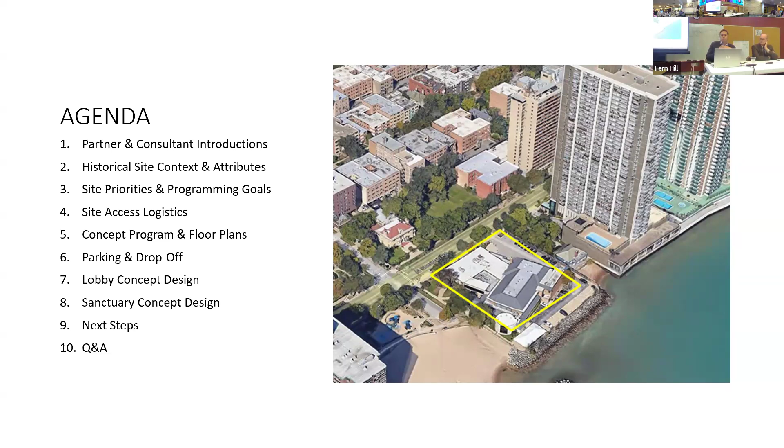We already went through partner introductions, so just in terms of our roles: Eckenhoff Saunders is an architecture firm, Fern Hill is a development company, and together we're advising the synagogue on its future plans.

Again, a brief history—many of the members here know this, but for those online who may be just finding Emanuel congregation for the first time, I wanted to put this in context of how we ended up here today. The synagogue was founded a very long time ago, in 1880. A group of members purchased the land site we're on today in 1944, and at the time there were roughly 1,000-plus member households.

The existing synagogue was constructed in 1955, so a very long time ago. It was, or is, 34,000 square feet.

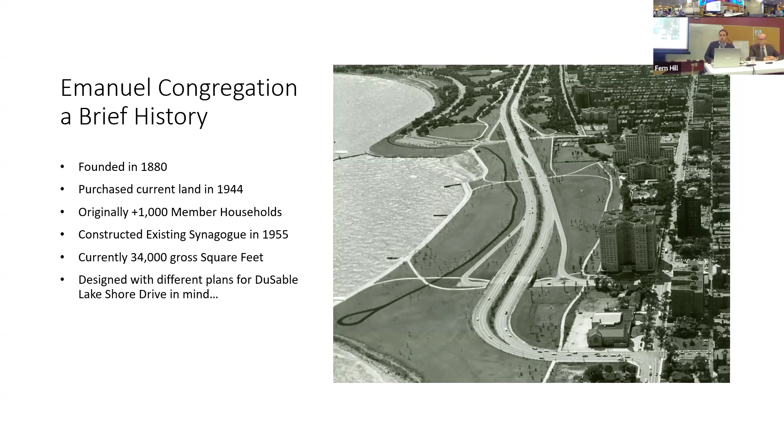The reason there's a picture of Lake Shore Drive is that it was a seminal fact at the time—the synagogue planned for Lake Shore Drive in the late 40s and early 50s to actually run past the synagogue property on the east side, which is now lakefront. Then, a little after 1955, it was announced that Lake Shore Drive would stop at Hollywood. So here we are today, 80 years later.

So even though it was 80 years ago, that's still something that affects the synagogue today, and how the building is positioned on the site, and really the broader Edgewater neighborhood as a whole. Because a lot of the issues that both the synagogue deals with, and the broader community with traffic and congestion, really stem from 80 years ago, when Lake Shore Drive ended at Hollywood instead of continuing past this neighborhood to Rogers Park or all the way to Evanston.

It's interesting that something so long ago is still so relevant today, and really changes how we look at the site. We couldn't help but think about the future, but I wanted to show a graphic of how different things would be today if Lake Shore Drive did extend.

A lot of how the site is set up today makes a lot more sense when you see a highway on the backside, because the building really does turn itself away from the lake. Which today we think of as so counterintuitive, but 80 years ago the members were planning for a totally different future and circumstances that they thought were coming.

So there was a single access point to the northwest corner, which is how you come into the front of the building and parking today. Just looking back for a moment before we talk about where we've been, before we talk about where we're going.

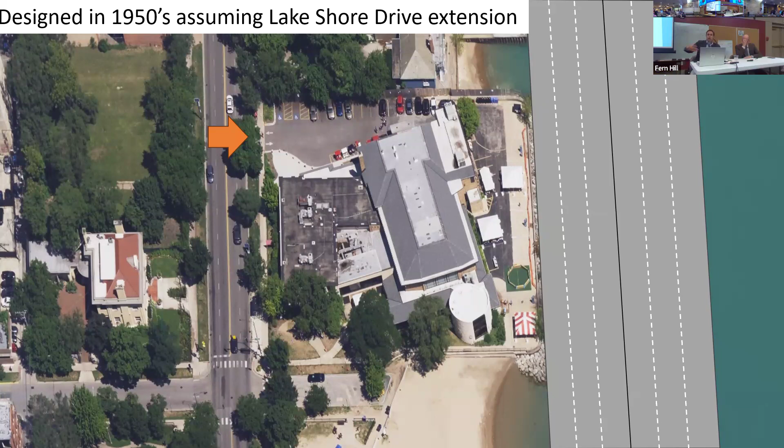To the north of the property it's a pretty hard line, with a very small site with a single family home, and then a very large condo building to our north. On the south and east side of the property, it's a little softer.

You can see there's more green, the lake to the east, the beaches to the south. So there's a dichotomy of harsh Sheridan Road and urban landscapes to the west and north, and then that quickly transitions into much more serene and natural areas.

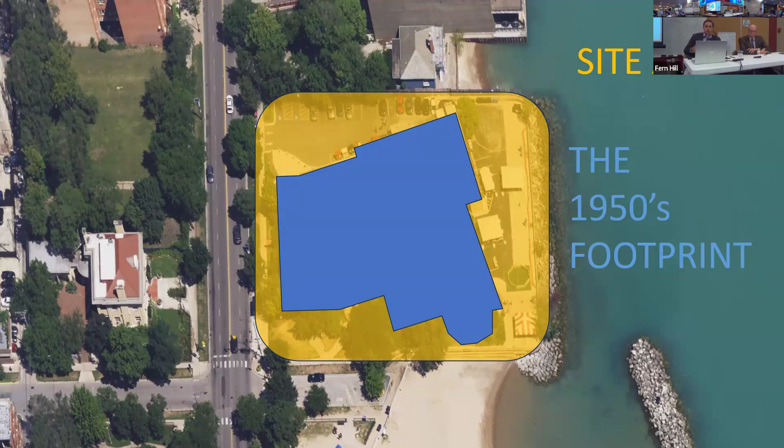Very high level, this is looking at the piece of land, which is roughly 64,000 square feet, and the shaping of the building that's on here today. It's a relatively large footprint building covering the whole site, but not particularly efficient.

So what this represents for you all and for us is the ability to completely reimagine your future. So as opposed to looking at what is, it's really looking at what could be.

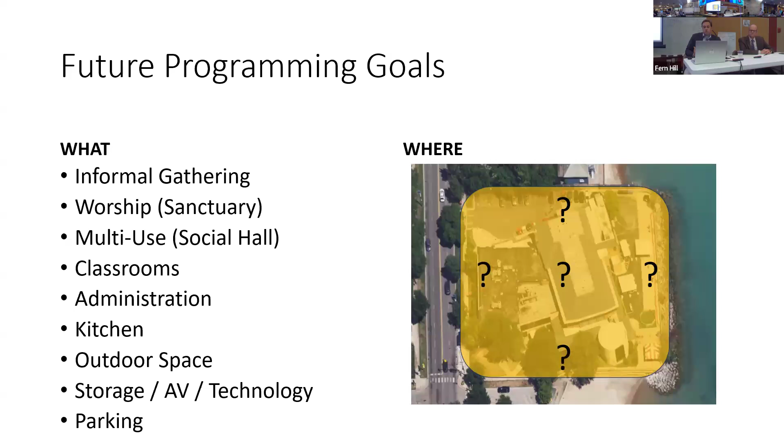The programming goals that you all have been thinking about include informal gathering space, worship and multi-use spaces, classrooms and administration, and back of house things like kitchen, storage and technology, and of course parking. So it's for us, it's finding not only what needs to be programmed into your site, but also where it needs to be. And not to bury the lead, but this is what's most important.

The main objective is really undoing the 1950 decision to turn the synagogue away from the lake, and instead re-engage with Lake Michigan and embrace the lakefront.

It's also an opportunity to right-size for today's members, the size of the synagogue, and the types of programming. The simple move, which you'll see when I pass it off to Matt, is shrinking the footprint and moving it all the way east to be on the southeast corner, predominantly of the site, the best corner, engaging the lake, overlooking the beach with the skyline in the background.

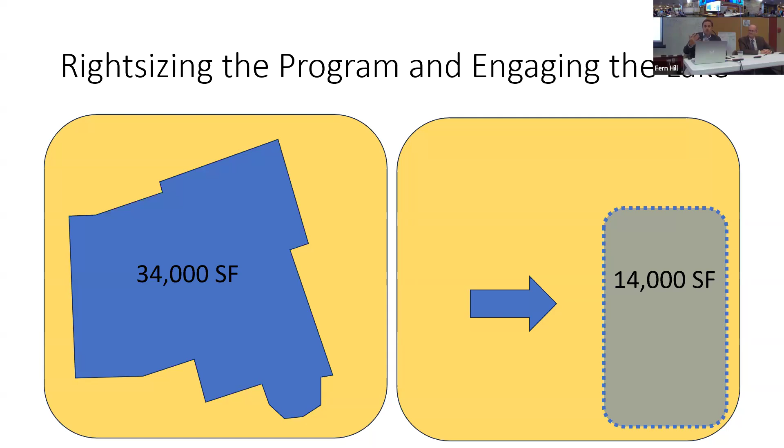So the next piece of that is, again, 60,000 feet, Lake Shore Drive, the site elements, and where the majority of this programming wanted to find itself. And then that's the easier piece.

And so of course I handed off to the architect to figure out the harder piece of it, which is the challenge of how do we fit everything in that box, and what are the issues we hit in terms of site logistics, access, pedestrian experience, and parking. So that's what Matt's here to cover now.

Thank you, Nick. I'm going to stand and see.

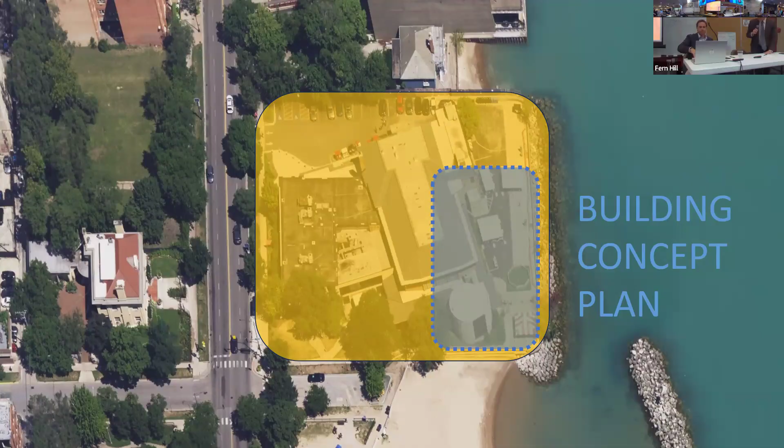I go this way, so I'll probably use the pointer. Hi, yeah, I'm working on the best corner of the site, so I feel pretty lucky.

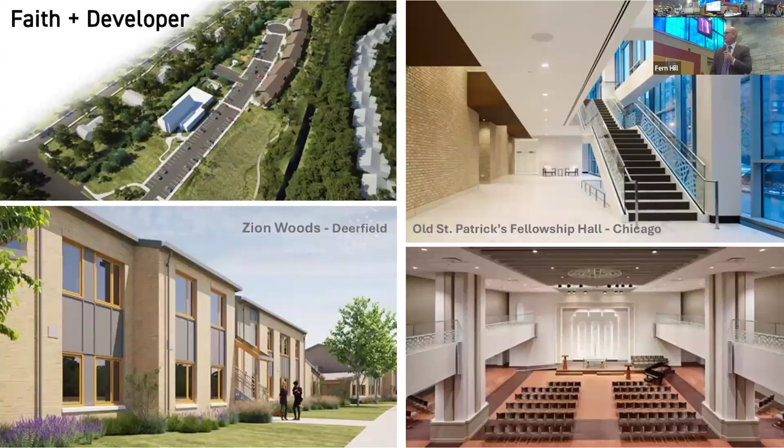Here's a couple of recent projects. One for Old St. Pat's actually is a couple of years old, but it's a partnership between a developer and a religious entity for the mutual benefit of each. It works great, and we had experience in it.

The Zion Woods in Deerfield, I'm particularly proud of because that's my church. As our church grappled with the same issues that you are grappling with, perpetuating in a sustainable way, staying vibrant, being true to mission, we had a nice piece of property and we wound up selecting development of an affordable housing project, which opened this year and it's full. So it's great to have the opportunity to be working in partnership with a developer.

Here is the expanse of our faith-based practice. We cover a lot of territory here in Chicago, from the far south side up and out to Barrington and up in Lake Forest. And I think the next slide is showing our focus on Jewish projects listed off to the side here.

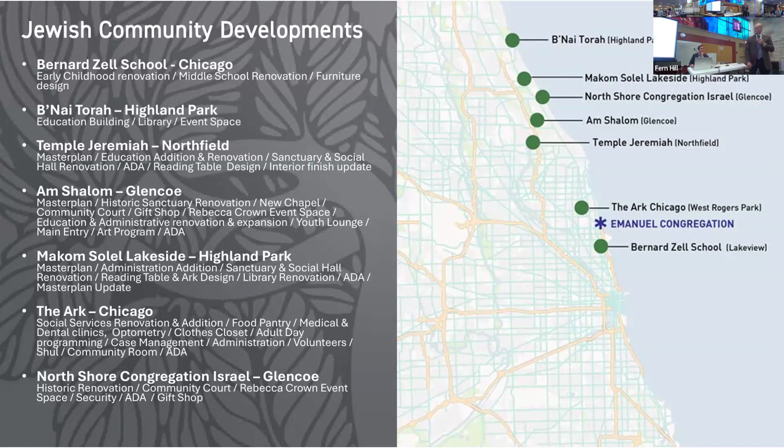When we first interviewed for the project, we asked a couple of very high level, 60,000 foot questions, that's where we are. But when it comes to planning, you need to drop that deck a little bit more and ask questions that are drivers of design.

And so we took those high level questions and translated them into principles or questions that would drive the design forward. What is the level of connectivity between Emanuel and its community, however that's defined, the community on Sheridan Road, the community at large? How do we want to be connected?

The views of the Lake. Nick has already talked about decisions made once upon a time that were done for the right reasons, but times have changed, circumstances have changed. How does that change how we connect with the assets of the site, the lake and the city? Site and pedestrian access, true for everything.

How do we get there? How close does it need to be? Do we be a little bit further back, certainly at the southeast corner of the site? We'll have to figure out a logical way for people to find you.

Internal functionality is the program. How do the spaces fit? What is their right size? How do they need to be different from what we've been living in for this period of time? Security is an omnipresent and growing concern. What is the right level of security while still remaining open to the people that you're in service to?

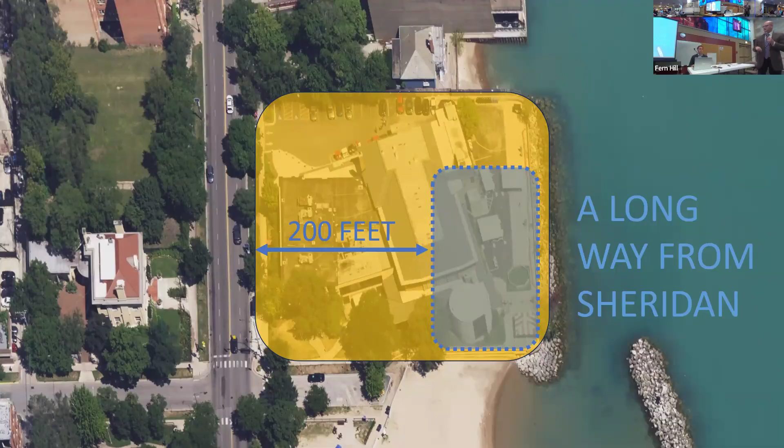Okay, yeah, 200 feet, it's a ways away from Sheridan Road. Your front door is basically right off of Sheridan Road now. So we have to figure out a strategy for how to get people to you, have to be comfortable. And we've got a couple of diagrams here coming up that have our best thinking on that.

We've taken the photograph of the site, overlaid it with just a diagram covering the site. The strategy, the Emanuel congregation footprint that we have right now is what's shown in, what are we calling that, orange or beige, depending on how your camera looks at it. That's the footprint of the southeast position for Emanuel on the site.

The strategy for site access here, particularly for Emanuel, is utilizing the Thorndale and North Sheridan Road signalized intersection. It's got a traffic signal there that regulates how people move, which simplifies wayfinding and provides safety. In discussion, we think the city of Chicago will ultimately tell us they really want us to use that as our connection point, so we leaned into that from the beginning.

What we're showing here is that to access Emanuel, you would take a turn to the east toward the lake and take a very short ride on Thorndale before turning left again into the middle of the site. You'll see the two arrows to the left, turning into basically the center of the property.

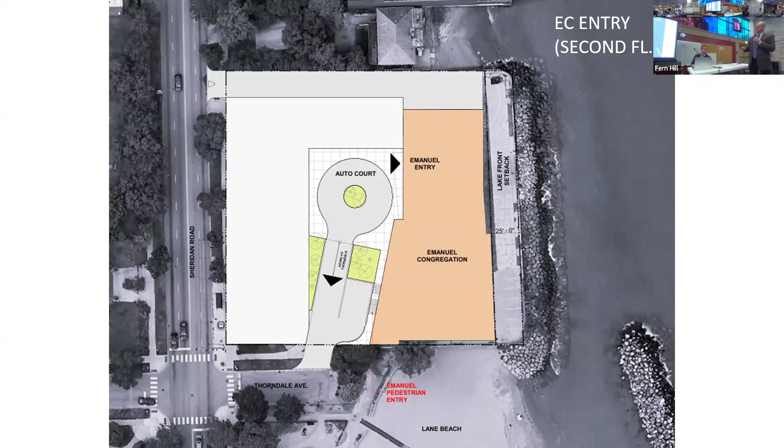At this level, which is the second level, there is a variety of green space and landscape space on the outside of the building, and the footprint for the congregation at this level is the same on both the first and second floor. Here you see them side by side.

That's the strategy for access. It's really simple. It maximizes the use of the signalized intersection and doesn't introduce more curb cuts on Sheridan, which is already an issue. So I think we've done a decent job here, at the first shot at it, of managing one of the problems that exist in the area, which is the traffic on Sheridan.

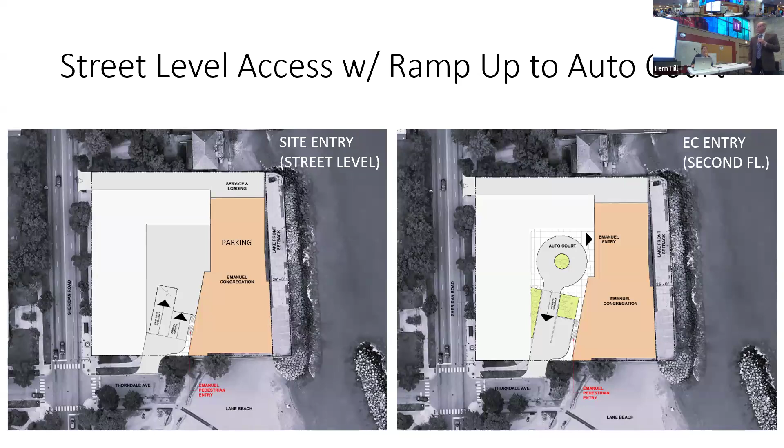Jumping into the plan diagrams themselves, you can see the auto court here, and the main entrance to the synagogue is here. Because the desire is to reconnect with the lake, we weren't going to hold anybody in suspense any longer. You've already gone up a ramp and through an auto court, might as well go ahead. Right off of that entrance is a lobby space that looks all the way through to the lake, and you'll see a view of that later in the presentation.

For ease of wayfinding and for hospitality, the administrative suite is directly off of that, with a direct line of sight to the door, so as guests arrive they can be greeted appropriately. We're imagining significant lounge space there. Before this meeting, I was walking around and seeing some of the artwork on the walls, and certainly some of that will find a home in that lobby space. So even though it will be new, it will have elements that are familiar to you all.

The building, of course, has a little corridor on this main level that runs along the west side. Off of that, you have access to the social hall, which is subdivisible with a vertically retracting operable wall, a little bit different than what you have now. At the end, you have your sacred spaces, the sanctuary at that far southeast corner, and a chapel at the southwest corner.

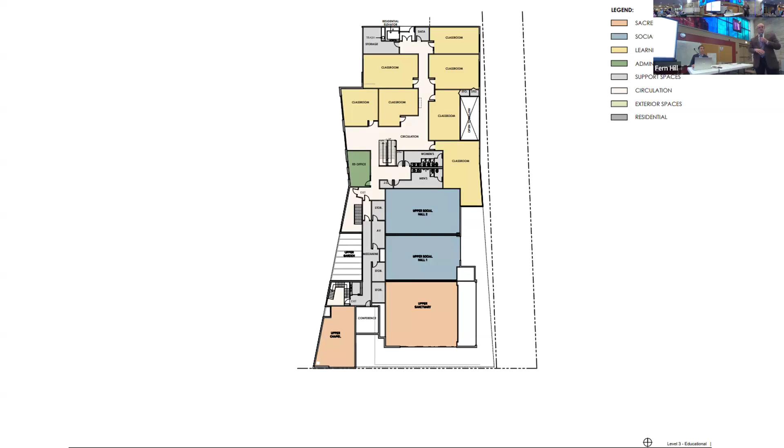So the plan between the main level and the second level is similar in organization. We get a nice side by side, and that's pretty evident when you put them next to each other. Again, the central stair is right here, and right here, connecting those.

Nice. Yeah. Okay. Did you mention that other beige or orange corner? Did you say something about that space?

Yeah, this is the chapel. You've got a really nice chapel, you now have a really nice view in that chapel. Let's not lose that - just because we're going to recreate it, let's do it again. So that is something we added to the program that wasn't initially there.

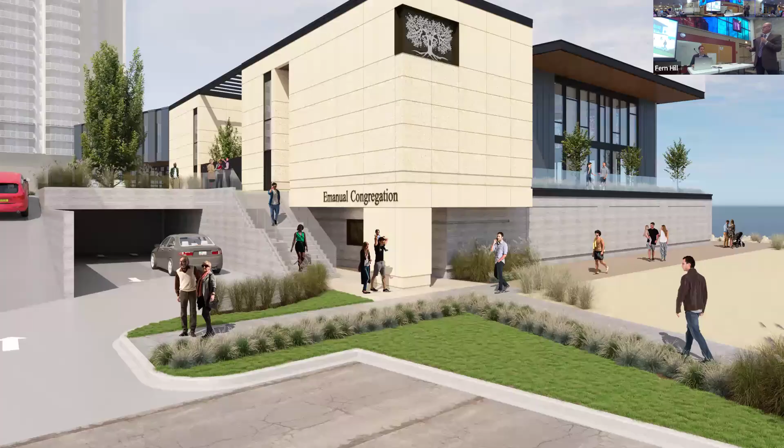Here you've got - you can see that the synagogue level is really at level 2. And so this skyline terrace is up at that level, providing great view and security when you're outside.

Okay, we got up to the second level and here we are. We're standing in the northwest corner, looking back at the main entrance for Emanuel, which is right here. You can see there's plenty of room to circulate around.

There's a couple of spaces for drop off and for sort of short-term parking, a little bit of green space up at that level, and here's that same red car coming up, taking a turn, picking somebody up and dropping somebody off. This is for education and lounge space on level 2. We imagine that there'll be some sort of welcoming art piece as a part of this glass front.

And in between this mass, which is clad in stone, and the chapel clad in stone, is a secure outdoor under a trellis garden on that east side, providing some really nice natural light into that long corridor that is serving the main spaces.

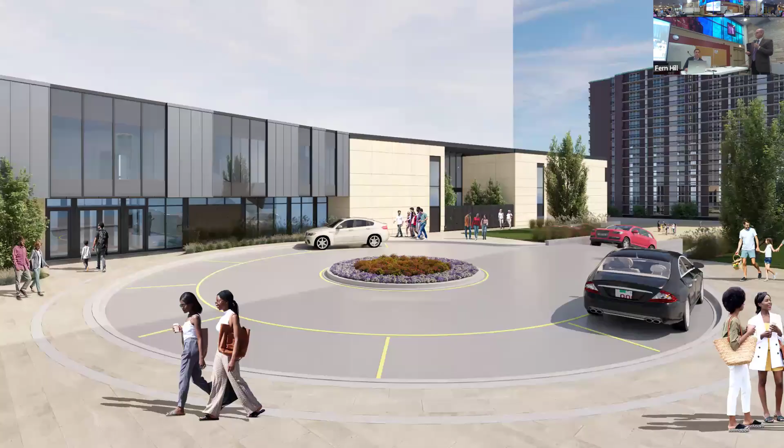Okay, if we walked in the front door, this is what you're greeted by - a nice open lobby with art, either from here or that you would purchase and bring, or other important things that you want to greet people with. And a direct view out to the water.

Plenty of social space - just off camera to the left is the administrative suite, so if you needed help when you arrived, they'd be right there to help. Here off the right hand side, you're seeing that long corridor that takes you down to doors that would take you out onto the terrace.

If you were there for an educational function, you would just go straight up the stairs, and all the educational spaces are directly above you, above the lobby.

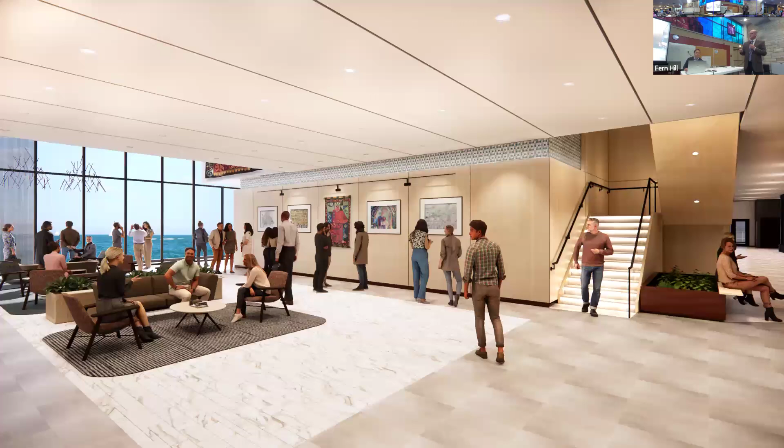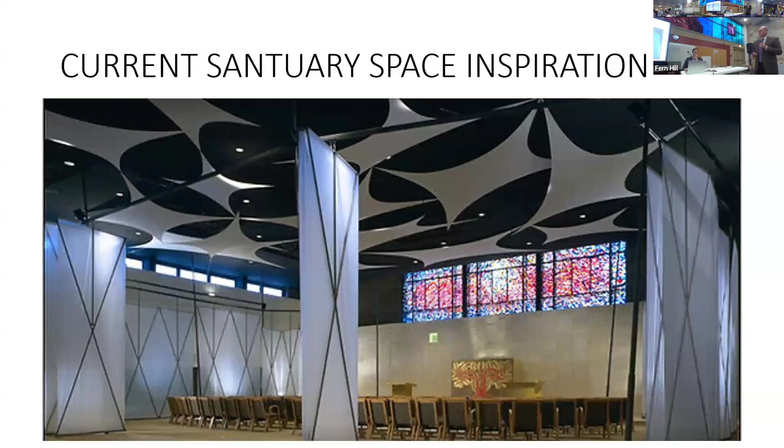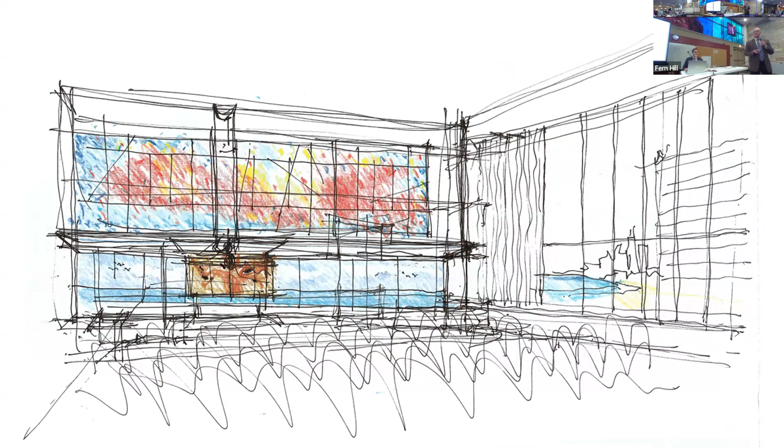And that's the starting doodle for the whole thing. Something else that we imagine, when I say we, I mean myself and the rest of our team, which includes an interior designer. Has anyone heard of James Turrell? Yeah, he's an artist that does mystical things with lighting.

They mentioned that when they saw the sketch and said, really, this is what we need. We haven't figured out exactly how to do it because it's a little bit down the road, but it's something that's rolling around in the back of our team's mind that we would add as a layer to what the space currently is. So very excited about that.

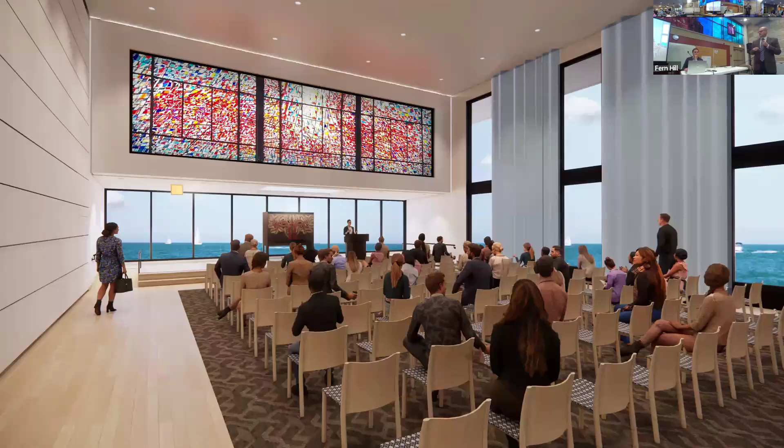A question came up earlier about, hey, what if we're facing east here? What about high holidays? The social hall spaces, the door in between and the door between there and the sanctuary would come off, and we would install a temporary bema at this south end. Things would move for that period of time, and then for the rest of the year you'd be back in this more normal orientation.

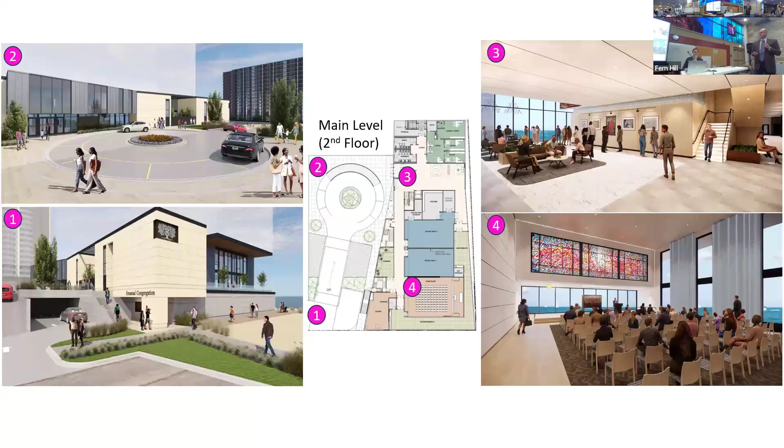There's all of it kind of together in one piece. Nick would tell you, but I'll tell you now, we're at sort of a plateau. If we're working conceptually, we've done a certain amount of work, but there is so much more development to a concept like this that has to come: getting more precise with the program, taking a better catalog of the artwork and things that need to show up here, drilling in on individual spaces and talking with folks about what those need to become, what detail elements, what pieces of equipment, what sort of workflows need to be accommodated. So everything you just saw is going to continue to change as time goes on and we do more work together.

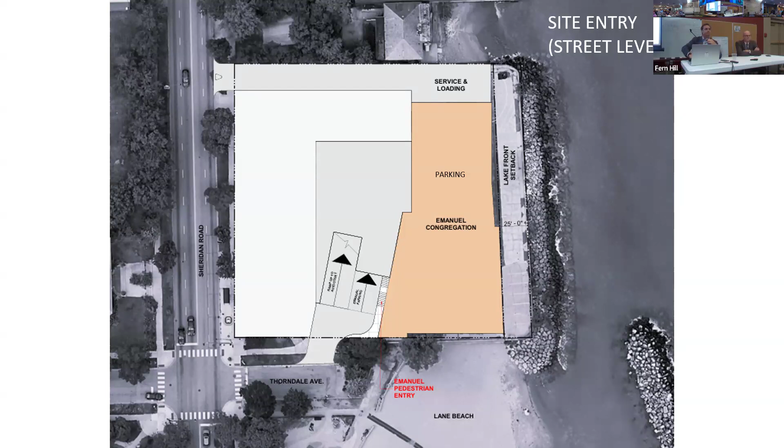The question was, are we thinking that the chapel, which is currently round, maybe is not round in this version? The answer is yes, we are thinking that. But like I said, we're at the beginning of a design process, and even though this looks done, it's not even close. So conversation will continue on that, and if ultimately there is a driving desire for curved geometry, whether it's a circle or something else, there is plenty of space in the process to explore that. Right now, we're showing it not curved. Thank you.

Is the ground level floor like basement storage? You haven't mentioned anything down there - are you just not having anything on the ground floor? So the question was, what is the ground floor of the project? The short answer is parking.

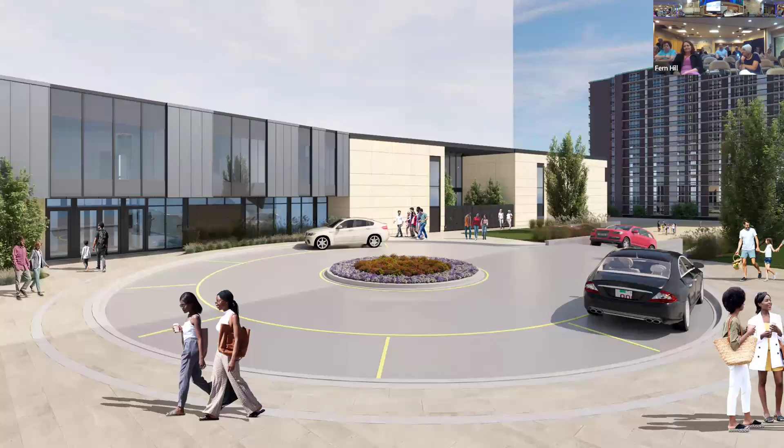I just want to add a supplement—I had that feeling looking at the sanctuary. I think it's magnificent, and I love the idea of having the lake behind the ark. But that would still be kind of private space. It's that view to the south that feels exposed, and there are a lot of solutions to this kind of thing. It's not even just a matter of people climbing in windows or shooting in windows—unfortunately these are realities for us—and there might be ways you come up with to make the openness optional at times, like window treatments or whatever. I'm sure there are solutions to it.

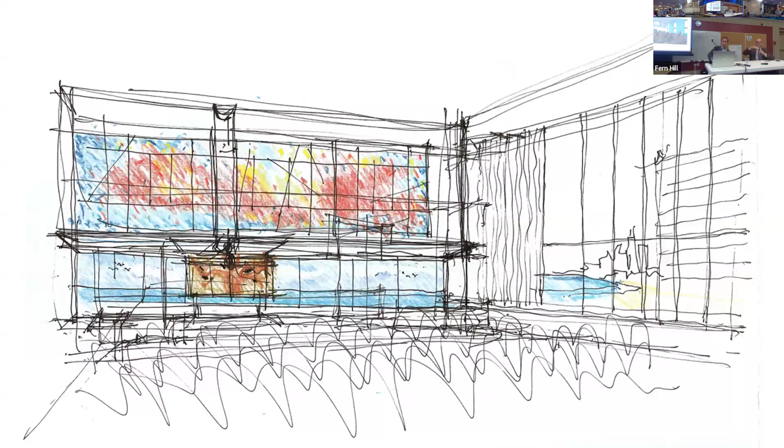My reaction was like, I winced literally, thinking about that right side I spoke of. We did at one point show there that guardrail height is like 42 inches—even though it feels very open as you're standing and looking out, if you were to continue it as solid up to 42 inches, it's fairly protected from somebody at grade. If they're scaling the wall or coming from one of the high rises, that's different—there are things you can't do, but it's just something to think about.

It would again be part of that broader question: what's the balance between needing security, feeling secure, and wanting it to remain open to both city and lake? The view is one of our favorite things about the building.

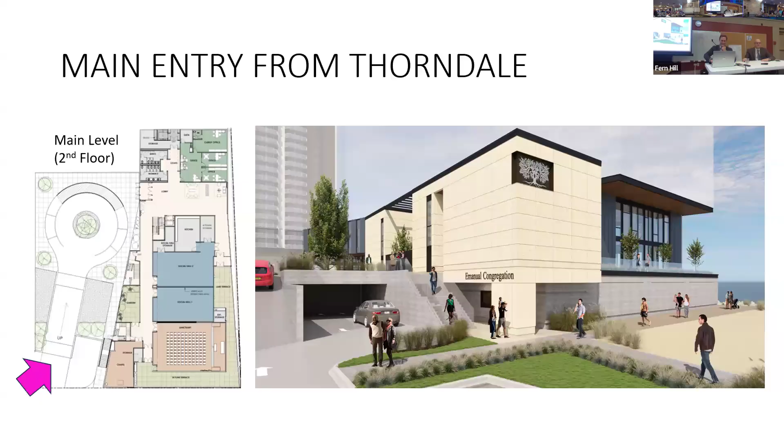Any questions on that, sir? That was a good question. When you showed that floor, going down from the sanctuary to the bathrooms, that seems like a very long distance. Maybe somebody was going to bust us on that. The sanctuary is at the front, and that's a long distance to the bathrooms, which are way over there.

So for those online, the question or comment was about some things like distance to bathrooms. Those are sort of even big, but also very small comments that we want to hear. No comment too small or too nuanced. If something strikes you later as a thought, please email it in, because we want to know all those little things and big things, from security to bathrooms, and everything in between.

Is there a thought of incorporating the other stained glass that we have here? You have a lot of beautiful artwork. I think we would want to talk with whoever the planning committee was, to say, hey, what is it that we want to carry over and what might work? We have other places in the plan that things can be utilized and displayed, certainly stained glass facing the lake, or somewhere in that gallery space, kind of around the corner, would possibly work. So yes, we thought about that, but it didn't show up in any of these views.